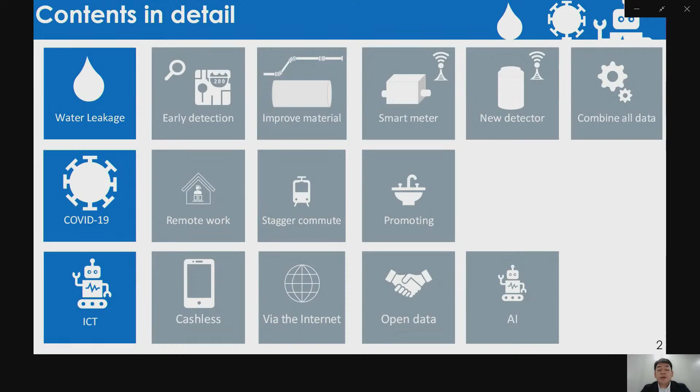As I have mentioned, my presentation is divided into 3 parts as follows. First, I would like to explain how to prevent leakage in Tokyo. Second, I will talk about COVID-19. And finally, I will explain the use of ICT.

Before we get into the content, I want to introduce the overview of Tokyo water. Please take a look at these figures. There are currently more than 13 million people living in Tokyo. With the exception of a few local governments, almost all residents in Tokyo use our waterworks. Our water supply area is about 1,239 square kilometers. The total length of distribution pipe is more than 27,000 kilometers, equivalent to roughly 2/3 of the circumference of the Earth. Annual water distribution volume is over 1 billion cubic meters. There are still more than 8,000 leak repairs a year. Tokyo is the biggest city, and we are the biggest water utility waterworks in Japan.

And I work with over 3,700 staff members. Now let's move on to the first topic.

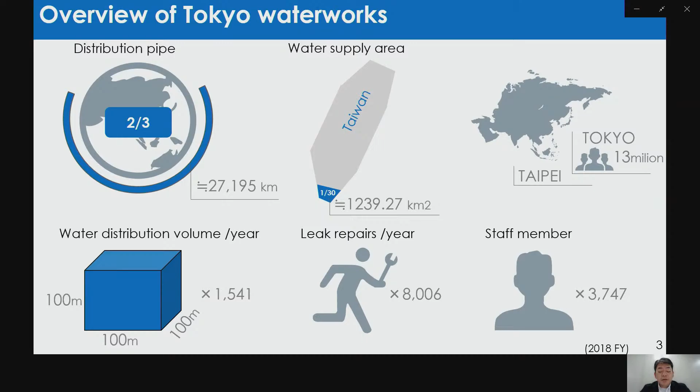I'd like to ask you a question now. Please guess, what is the water leakage rate in Tokyo? A, 20%. B, 10%. C, 3%. Please think about it.

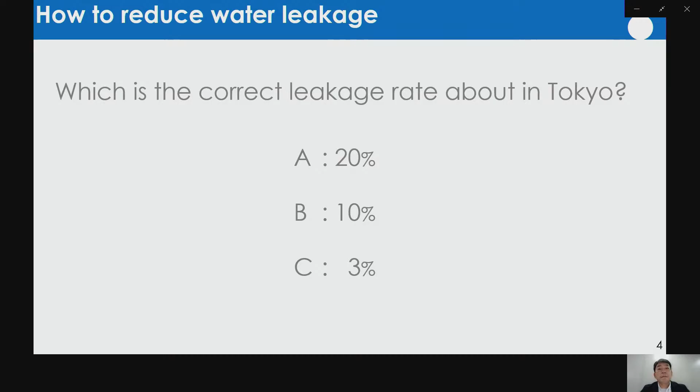Please take a look at this graph. The correct answer is C, 3%. In Tokyo, the leakage rate reached a hefty 80% after World War II. Emergency restoration after the war helped the leakage rate drop to 30% by 1949. The leakage rate was gradually reduced, and in 1992 it was down to about 10%. In recent years, it is kept to about 3%. Relative to the scale of our huge utility, we have one of the lowest leak rates in the world.

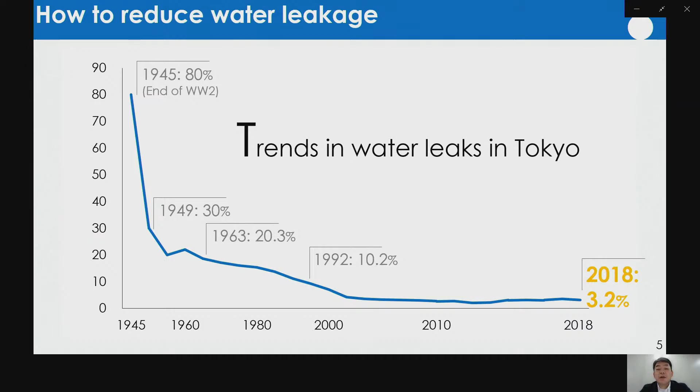So what kind of initiatives are necessary to maintain our current low leak rate? First answer is early detection and early repair of water leaks. In order to find underground water leaks, we conduct work called planned work. Specifically, we place a listening bar on meters of each customer to check for leaks of supply pipes, and we conduct leak surveys of distribution pipes by listening to the sound from street surfaces. The sounds from vending machines and sewers are also heard from the ground, and therefore a very experienced technician is required to tell them apart.

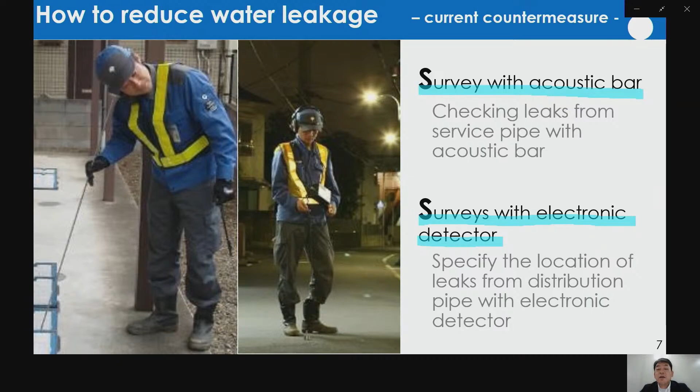Another method for finding the position of leaks is the correlation water leak detector method. We use these devices by placing sensors in 2 places, such as the valves on water distribution pipes. We can find the location of leaks by measuring the gap in time to reach each sensor. This method detects leak sounds directly from water pipe bodies, so it is possible to conduct surveys without being affected by urban noise or the depth at which pipes are buried. Normally, wireless communication distance is about 100 meters, and they can perform measurement up to about 200 meters at maximum.

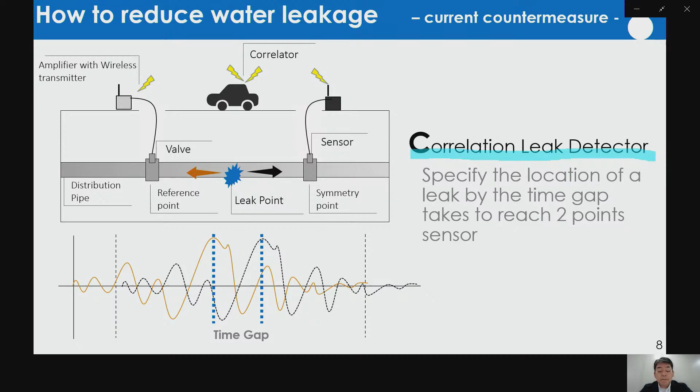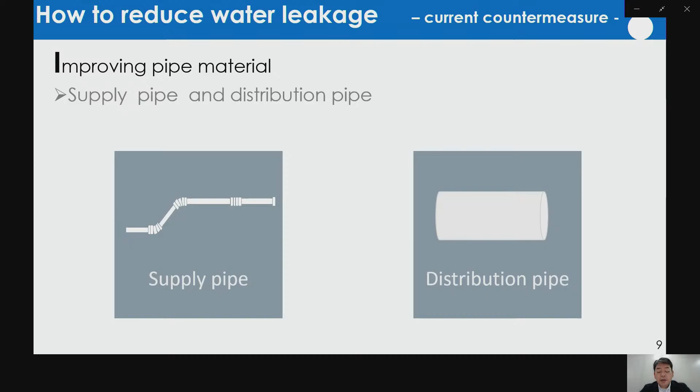Let's move on to the next answer. Second answer is improving pipe material. We have improved supply and distribution pipe material. In the past, our utility used lead pipes for water supply pipes on the roads. However, lead pipes are weak and corrode easily, so we switched to stainless steel pipe.

Currently, we use stainless steel products not only for pipes, but also for snap tap and valves. All materials used on the roads have been certified by our utility in advance to ensure product quality. Also, we are gradually replacing distribution pipe from weak cast iron to strong ductile cast iron. In addition, we wrap polyethylene sleeves around the pipes to prevent corrosion.

As you know, Japan is a country struck by an incredible number of earthquakes. Therefore, we use earthquake-resistant joint pipes with strong seismic resistance. The high elasticity and disconnection prevention features enable the pipes to follow deformation of the ground during earthquakes.

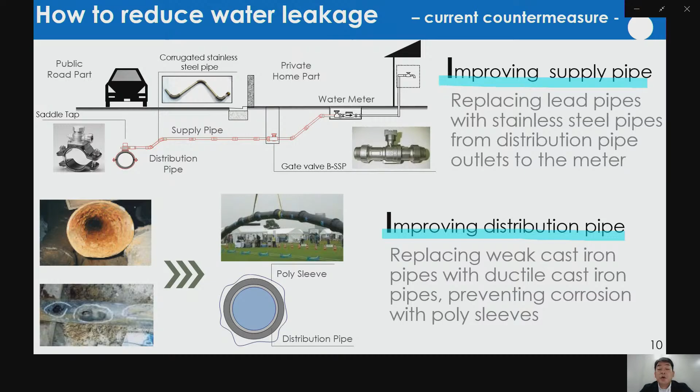Now, let's move on to the second topic, our future plan about water leak. I will explain the future plan from three aspects: smart meter, new detector, and data handling. First is the smart meter.

The Olympic Village has already been constructed in Harumi area. This Olympic Village installed 6,000 smart meters for condos that will be renovated after the Olympics. And by the year 2025, 100,000 smart meters will be installed in various areas in Tokyo.

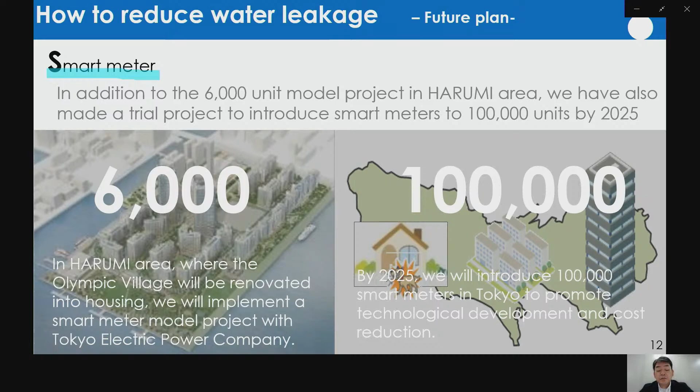In addition to these smart meters on supply pipes, we are considering the installation of smart meters on distribution pipes. This will make it possible to monitor the amount of water flow, direction, and pressure constantly. It's important for us to handle the data collected from new techniques. We believe that by combining data from these smart meters attached to water supply pipes and water distribution pipes, it will be possible for us to efficiently manage pipelines and speed up our response to water leak accidents.

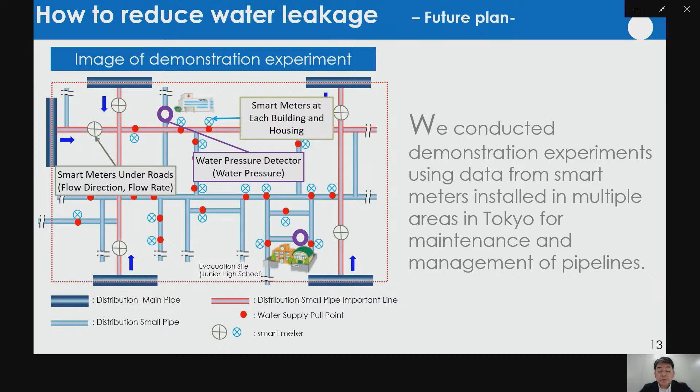Next topic is introduction of more efficient water leak detection methods. In current water leak surveys, there are subjects that survey methods feel dependence on human labor and difficulty to hear leak sounds.

The multi-point correlation leak detector is a survey device that we are currently examining. We have installed sensors on water control valves in multiple places on the road in order to find water leaks in a wide area at once.

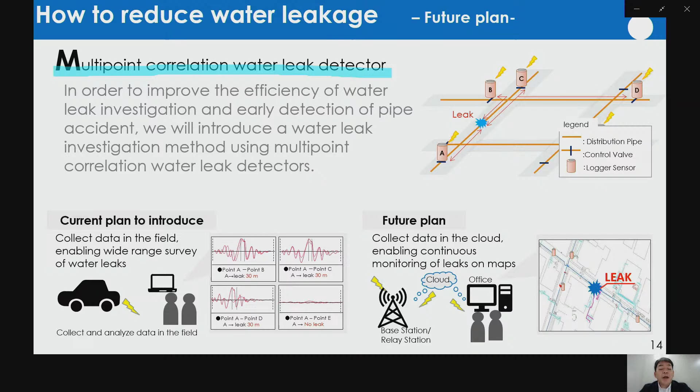By introducing this equipment, it is possible for us to efficiently conduct water leak surveys and to detect water leaks without being restricted by the surrounding environment. In the future, we expect to be able to constantly monitor leaks without going on site by collecting sensor data on the cloud with improved wireless communication technology and by combining it with a mapping system.

From here, I will talk about futuristic pipeline maintenance. Currently, we conduct pipeline diagnostic work for the entire Tokyo area. In this work, we survey the corrosion status of pipelines under roads and pipes under bridges and check the functions of valves and other equipment on site by operating them.

On the other hand, we have introduced a GIS system called the mapping system. This system has functions that display the arrangement of piping overlaid on map data, as well as functions to collectively manage information such as the age, type, and diameter of the pipes, and predict the area of suspension and turbid water because of constructions.

Our current problem is that the data obtained through the research and GIS system are not integrated. So, the huge amount of data is not reflected in the GIS system. As a result, there is concern that data will not be used when planning renewal projects as well as on-site work, and that leads to inefficient office work.

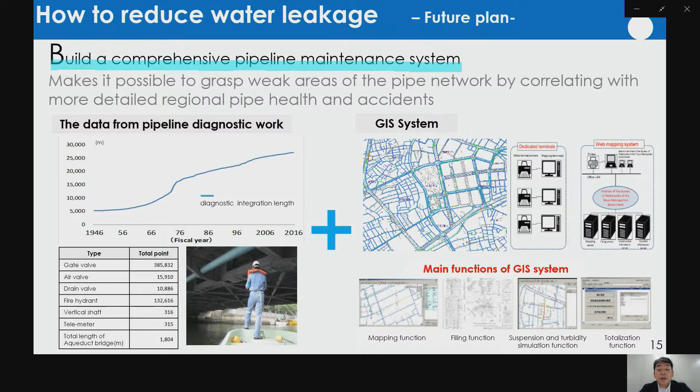By implementing this new system into a PDCA cycle, such as planning, management field, reflecting data, and verification, we will be able to efficiently execute maintenance work with limited resources.

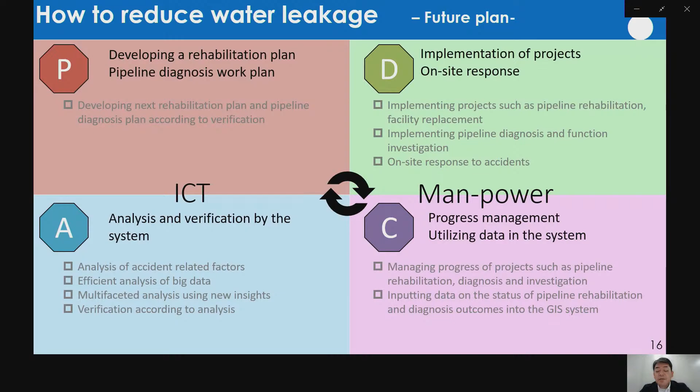In order to utilize diagnostics made by experienced staff efficiently and permanently, it is important that we combine and develop existing pipeline management systems. In the future, it is also important for us to consider new possibilities of ICT and AI, such as the use of mobile devices, and introduce them to our pipeline management work.

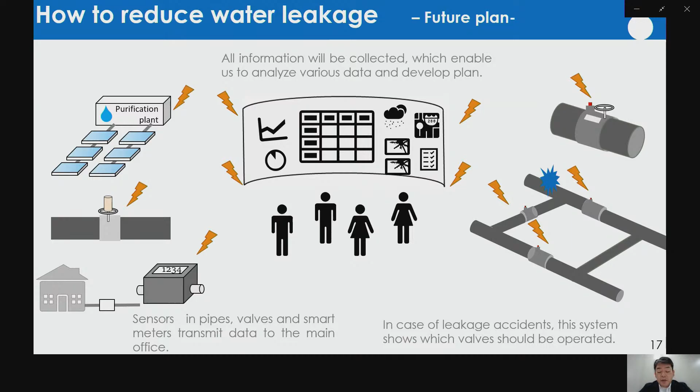This is the end of the second topic. Now let's go on to the next topic.

Next topic is COVID-19, which is now the focus of world's attention. I would like to introduce three measures that we are taking to deal with COVID-19. The first measures are remote work and staggered commuting.

This February, when COVID-19 began to spread in Tokyo, many companies began to promote remote working. In particular, many staff members in my office, which is located in Shinjuku, one of the biggest cities in Japan, are working from their homes.

Second, we require them to change their commuting times, which helps to reduce congestion of public transportation, such as trains.

The last point is about the prevention of infectious diseases. Hand disinfection is considered an effective way to prevent infectious diseases. Tokyo water contains chlorine according to Japanese regulations and provides sanitary water. Therefore, we promote proper hand washing using tap water, which contributes to the prevention of infectious diseases.

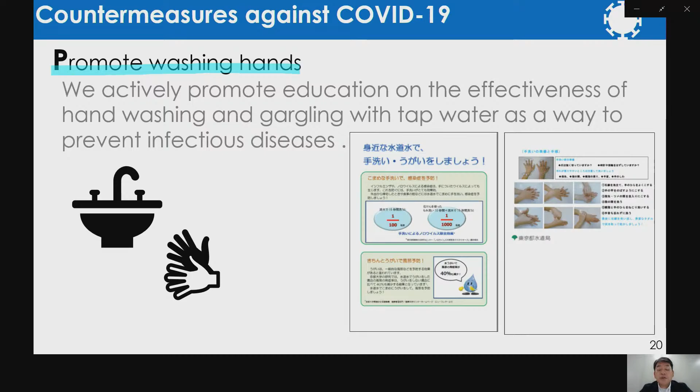This is the end of the second topic. Now let's go on to the final topic. Final topic is ICT. I would like to introduce 4 measures that we conduct with ICT.

In recent years, cashless payment with smartphones has become more and more common in Japan. So we have introduced a system that allows customers to pay their water bills via smartphone. This has made it possible for customers to pay their water bills with simple operations.

Next, let's talk about ICT-based projects. In the past, plumbers had to come to our office to browse water drawings. Now, plumbers can search, view, and print the drawings through the internet. This allows them to view them even when our service office is not open.

As well as browsing drawings, applications for new or modified water supply systems can be submitted via the internet. This system can reduce the waiting time for the water service provider's review.

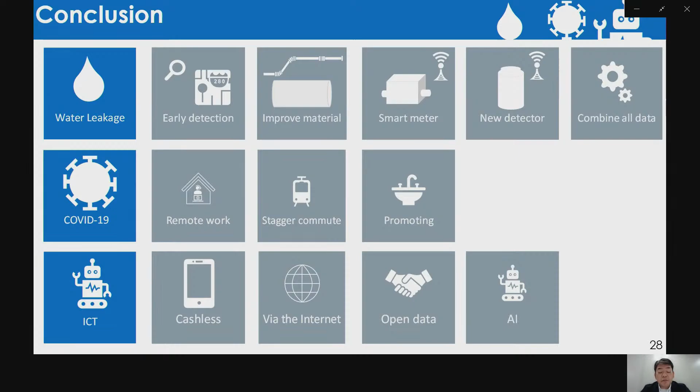I hope that my presentation will be some assistance to your countries and regions. There are 10 months before the Olympic and Paralympic Games. I look forward to seeing you in person here in Tokyo. This concludes my presentation. Thank you for listening, and I look forward to seeing you in the discussion later.

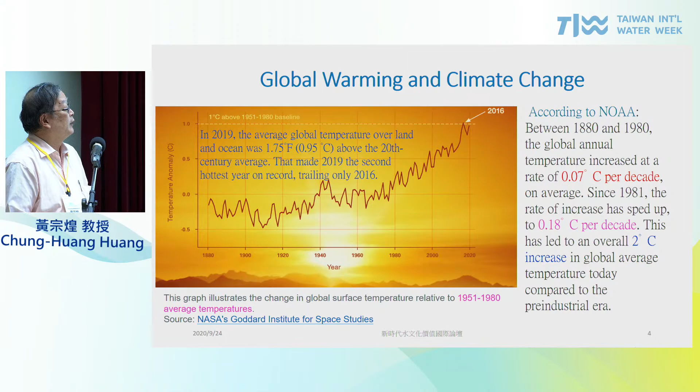This is the global change, the global warming situation, and this is the crisis or impact of climate change. I try to highlight all of them, and here you can see that the impacts of global warming on the water sector or water industry could come from different aspects—extreme weather, heat waves, droughts, melting ice. We can see this later on.

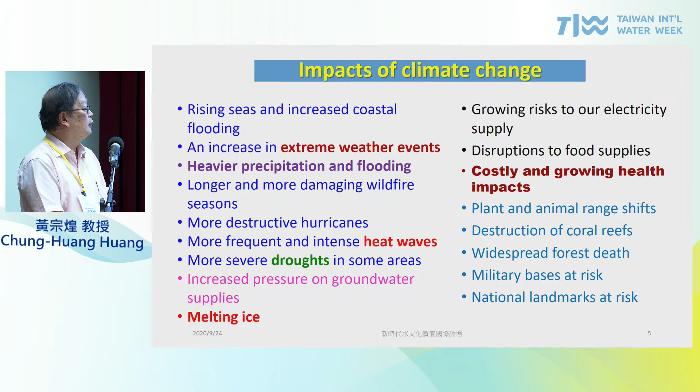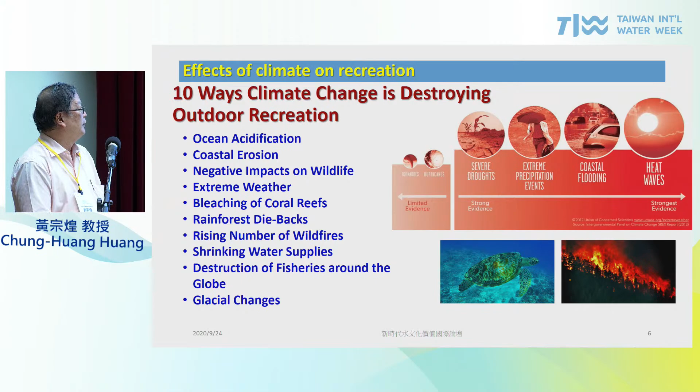Probably I would like to show you—oh my God, look at this! Oh! Oh my God!

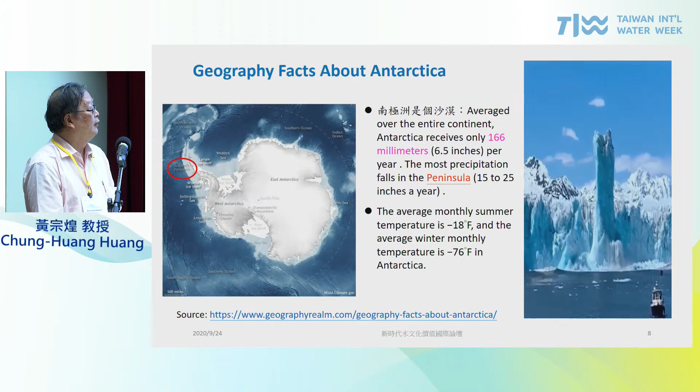Holy! Oh my God! Look at this run! Oh! Oh my God! Okay, and this is this situation associated with the Antarctic.

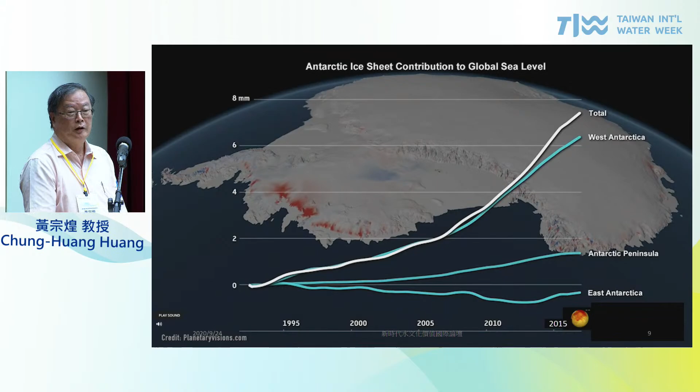South Pole here. And as we can see, the ice melting caused the sea level to rise significantly, especially in this area, in this region. And the problem from this is not only the sea level rising, but also water supply.

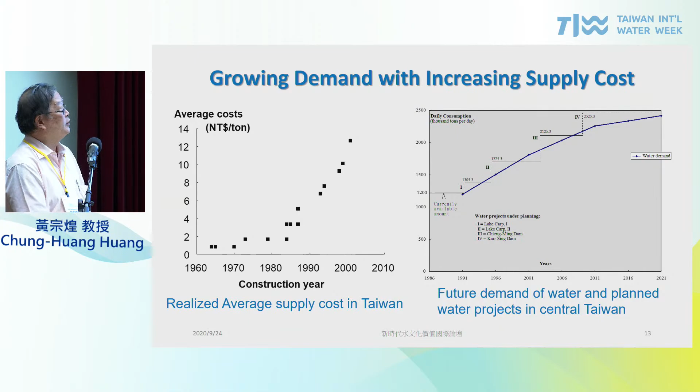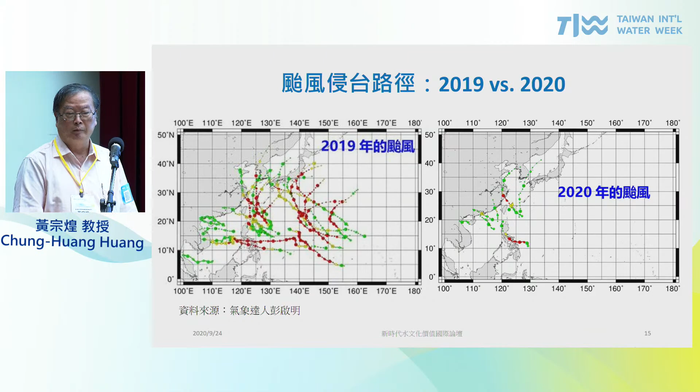And we are wondering, because this year although we don't have much typhoon coming to Taiwan, how about next year? Probably it will be another situation.

Just a very brief introduction about this. There are several important factors relevant to water pricing. The first one is, of course, the organizations. We have different organizations listed in our Water Act, and also there's a water priority of water use in our Water Act.

Fortunately, we have some policy innovation in this aspect that allows the priority to be more flexible in response to certain conditions, especially climate change or water drought season.

And water-related fees—the topic I'm talking about today is much more on the integration of these subjects, these instruments: water tap price, water right fee, water excessive use fee (耗水费), and loss compensation because of unavailability of your water rights. You cannot get enough water supply because a certain situation happens, and there will be some compensation either from the water authority or from other demanders of the water company.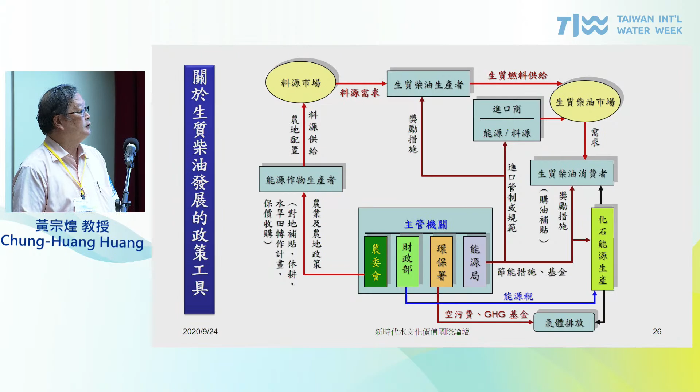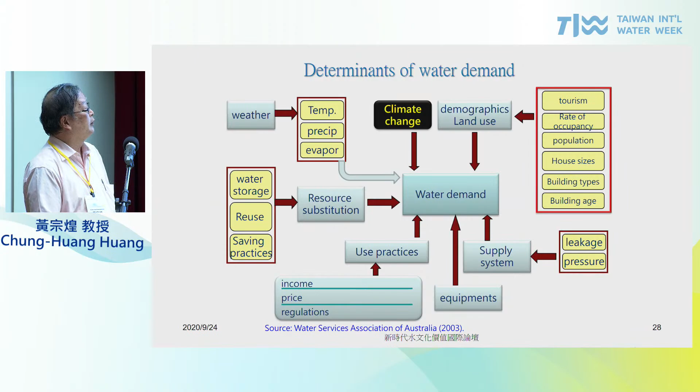And this is an example - we also have this model built and several simulations implemented. This is another policy framework for water supply. Because of time constraint, I will not go into detail in this part, but this shows how the modeling could be completed, and the same applies here.

Because of the time, I will now come to my major conclusions. First of all, the integration of policy is very important. It's not only an economic problem, it's also a social problem and a resource problem. It has a significant impact on society.

The integration of policies, although very complicated, is operationable if we can work together in a more harmonized way. Then we can end up with a model that will allow us to evaluate, in a more effective way, the impact of climate change on water supply or water efficiency.

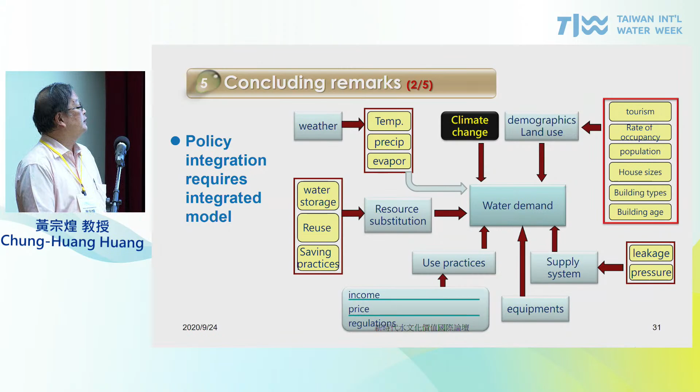Incomplete enforcement always prevails in many sectors, including the water sector. The problem is, when doing policy integration, how can this be taken into account given incomplete enforcement, as we see many different forces causing it. Policy integration requires an integrated model, as I mentioned before.

Another important conclusion is that water policy should not be independent of macroeconomic policy. From the experience of the financial tsunami, we can see that macro policies are very relevant to many policies, including environmental, energy, and water policy. The problem is how can we integrate water policy into our national or macro policy. This diagram shows the linkage between them.

In the last presentation, Mr. Tanimoto mentioned a lot of new technologies applied in the water industry, especially for monitoring water leakage. In the face of the fourth industrial revolution, there are so many newly emergent technologies available, and many of them could be deployed to improve our water industries, not only in policy integration but also in water use efficiency.

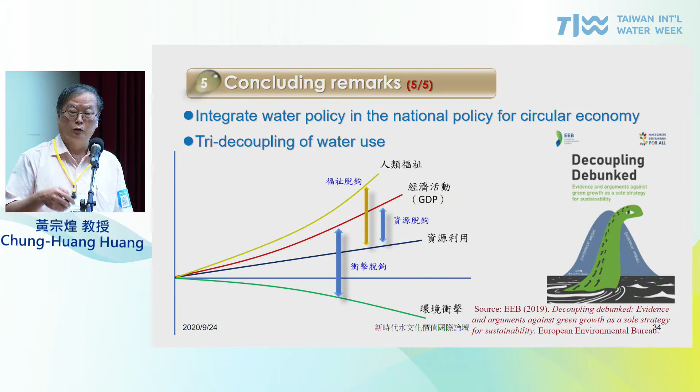Many governments are reinforcing the importance of this linkage. In the water sector, we hope we can put more emphasis on this subject too. We are interested not only in resource decoupling and environmental impact decoupling, but more importantly, welfare decoupling. When we use water more efficiently, we hope the benefits created could improve all generations.

Finally, there are many challenges in this new era, including how we deal with the changing role of water resources in our new society. Health is one of the important topics. As Mr. Tanimoto mentioned, COVID-19 is also very much related to water resources. In the future, how can we build a linkage between the two?

Health, time, energy, and other aspects, macroeconomic policies or variables, to quantify the well-being loss from climate change and health. Although this hasn't traditionally been a topic in water resources, in the coming future we think integration with other areas is also very crucial.

New challenges to CGE modeling, as I mentioned, integrated modeling is also very important to avoid the same mistakes we made before. We have to cope with the new industrial revolution, deal with demographic change, and finally integrate uncertainty and discrete choice.

All of this will not be done here. We hope that in the coming future we can make our integrated models more complete and comprehensive, so that many factors could be integrated into our model. Thank you very much for your attention.

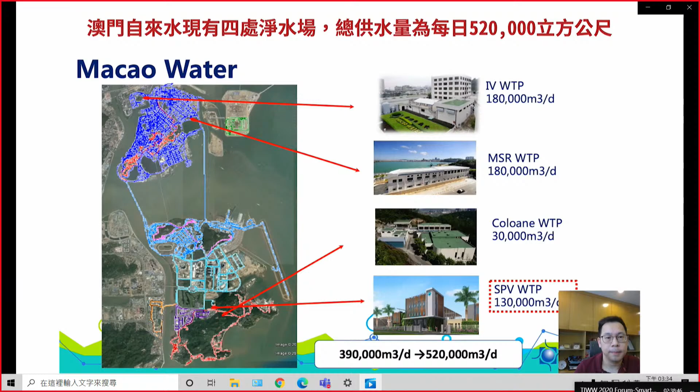After that, we do digitization. Digitization is the fundamental basis for smart water evolution, but digitization alone is not enough for smart water development. We also have to base it on automation and modeling. With these two stages, we can achieve 'smart,' though we're still far from artificial intelligence. Macau Water is mainly focused on digitization combined with automation and modeling to achieve smart water. Once mature enough, we will move to artificial intelligence.

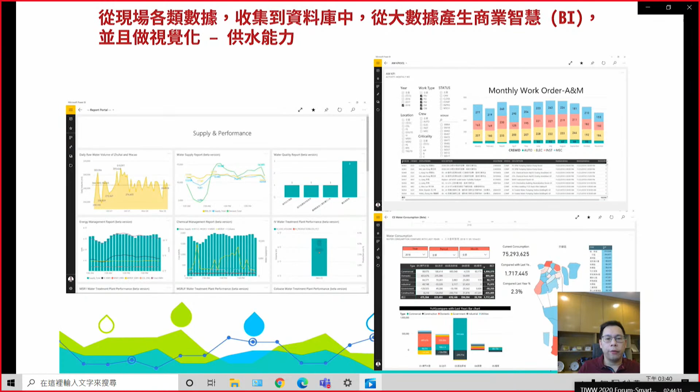I will show you one example of Power BI usage in Macau Water. Here is 2 months of data on LIMS alarms or alerts in the network. We found that there are 5 alarms in the network for the past 2 months, and we located one location, in Haksa village, which is a low residual chlorine issue. The figure is 0.03, which is pretty low.

So we try to locate the upstream and downstream of Haksa village. First, we look at the Haksa village data for the past year - the residual chlorine data - then the upstream and downstream. We find that the downstream and upstream don't seem to have any issues or problems, so we can conclude that the problem is the Haksa village sampling point itself. This Power BI helps us make decisions.

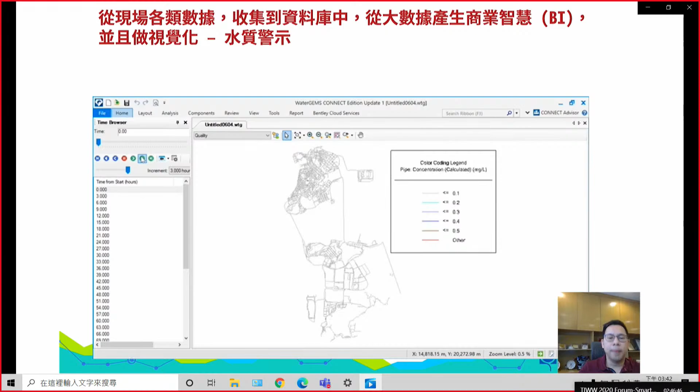So from time to time, we have to flush the networks, trying to keep the age of water young. That is decision-making through this hydraulic model.

Besides the master data management and modeling, we also have advanced water network tools. This is a quite advanced water network platform, and we can see the water coverage from different water treatment plants. We have 3 treatment plants, but 4 pumping sources at the moment. The red represents one treatment plant's water coverage, and other colors represent different water treatment plants. We can identify that at different hours and periods of time, the coverage will differ depending on pump operations and control valve operations.

You see that on this particular day, at 1 o'clock midnight versus 2 o'clock, they were very different. And 8 o'clock in the morning, 9 o'clock in the morning, 6 o'clock in the evening, 7 o'clock in the evening - so every hour we have different behavior in the water supply coverage.

As you can imagine, we can also modify or monitor the different water supply velocity and head losses in individual networks by means of this platform, because we embed the online hydraulic model inside it. This is very useful for our operators and network engineers. So we've talked about data management and model usage.

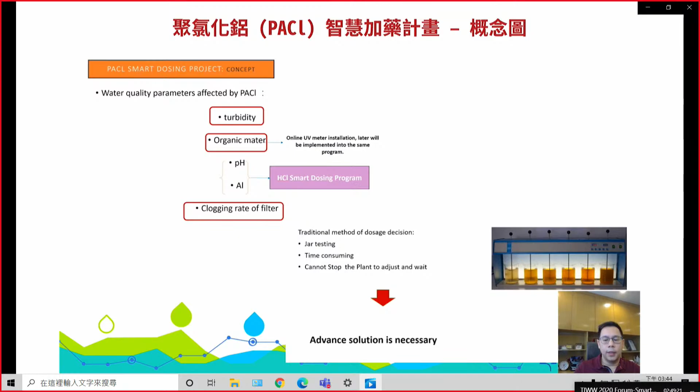We have to take a lot of parameters from the treatment plants, so we install a lot of sensors. The project started in 2017 and took less than 1 year. We succeeded in implementing this smart dosing, installing quite a few sensors for our water treatment operations in Macau Water.

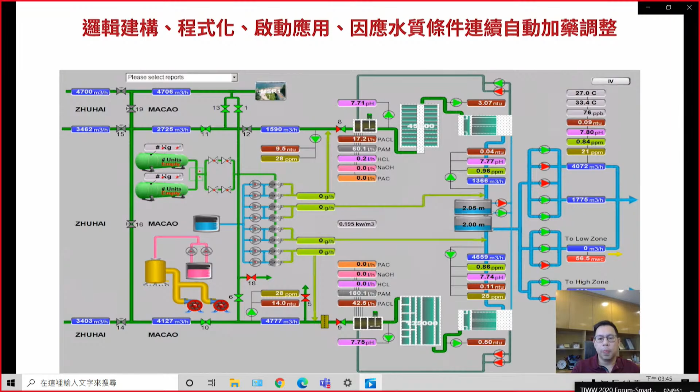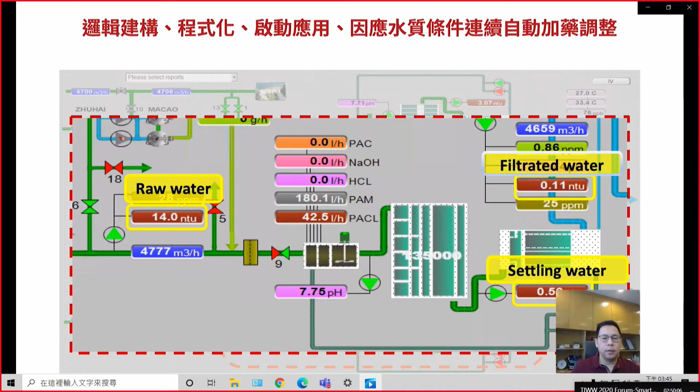We have quality sensors at the raw water, settled water, and filtrated water stages. They feed back data to our automation systems, including filter parameters like filter clogging rates, production of plants, backwash of the filters, etc. These combine together with the water quality sensors.

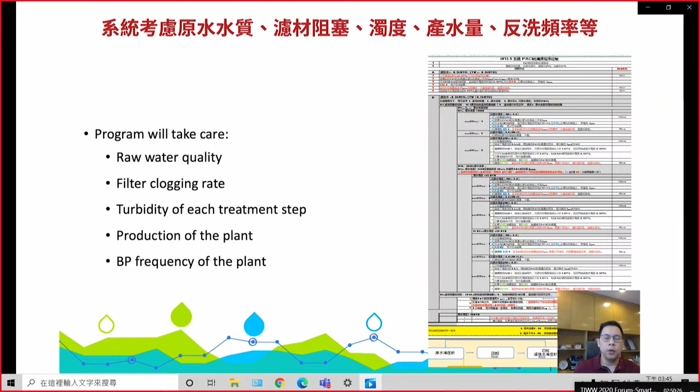After 1 year of operations, we saw something like 30% to 40% savings compared to previous years, even previous 5 to 10 years. We achieved as large as 50% savings for the PACL dosage. This is quite significant, and beyond our expectations, we can say.

Another example is AMR smart metering. We installed about 500 meters to cover all of Cotai city, which is a commercial area - most of the casinos and big hotels are in these areas.

We use the Suez solution called FM169. We only installed a very few concentrators that can connect across this area, which is quite large compared to the whole of Macau. Only 3 to 4 concentrators can receive all the meters in this area.

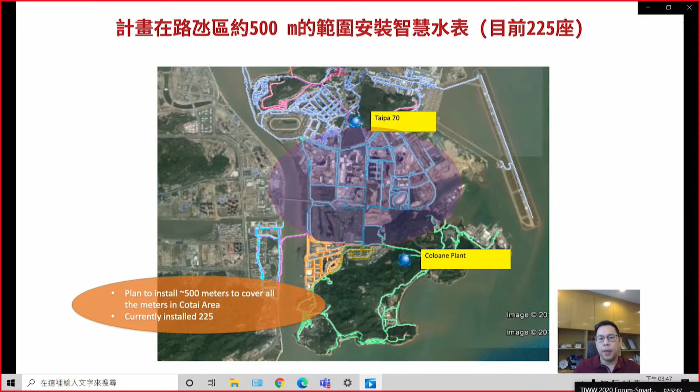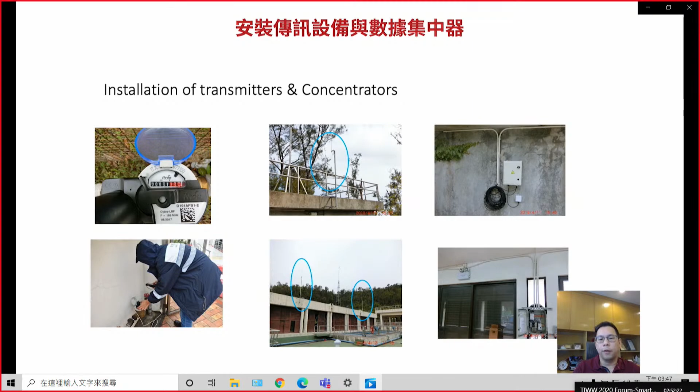We installed about 500 meters here using 3 types of concentrators. They connect all the meter readings, and then through GSM transmissions, send all those 500 meters' data to a data server. The data server platform is called EMIS, which tries to collect and analyze the water supply behavior, and also detect any leakage inside the properties.

We successfully feed this back to our customers - quite a few leakages have been detected through these systems. This is also part of our smart water sectors, and we have succeeded in building an integrated reporting system, along with smart solutions like smart dosing and AMR.

I would like to talk about another sector, the enterprise application platform. As I mentioned, in a water company we have different systems - for example, in the financial department we have a financial system, in the laboratory department we have a LIMS system, in the network department we have GIS, and in the customer information department we have a CIS system, etc. But they are independent of each other.

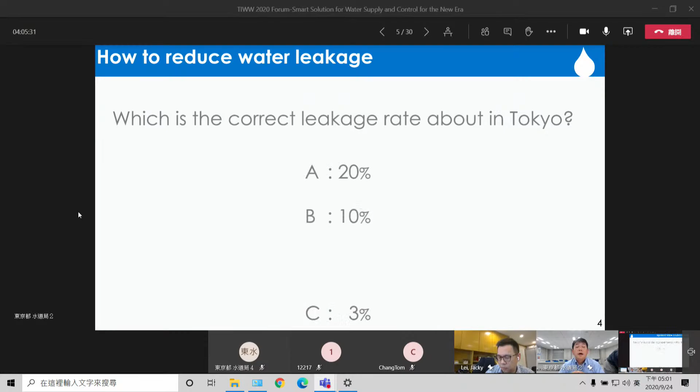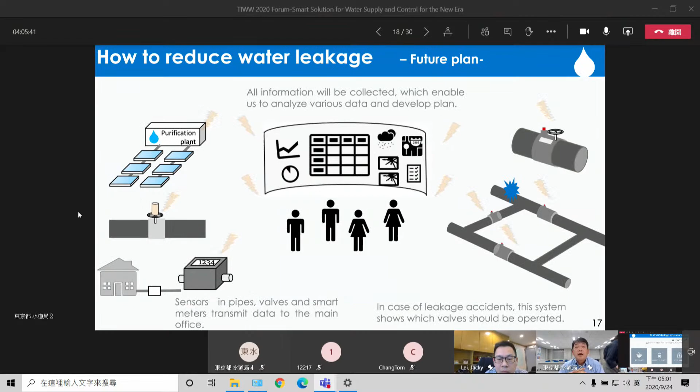Yeah, but for Mr. Tanimoto? Can you show the presentation with my slide? Please show page 17. Slide page 17. Yes, this is it. Yeah, we have the slide, page 17. This is it. Okay, yes.

So now we don't think about different prices and different use volumes for night and day, but in the future, in a few years, we have a planning about an installation experiment, like so. Especially, please show the water pressure detector in the upper area. Yes, and the same sign is on this picture down here. Yes, that's right.

In fact, this system will calculate the water volume and water flow. So we will check the volume and flow at several times - the normal time, national holidays, or night and day. So that we will realize the way water is used by domestic users. After this experiment, we will make a new plan for the distribution, a new distribution type. That's all.

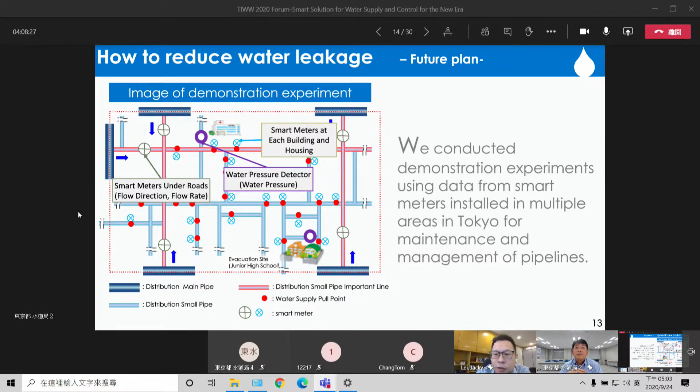Okay, yeah, Jacky. I don't think we can easily change the behavior of the customer to make them use more water during the midnight. I don't think it is possible. In many cities, it's the habits of the people that are trying to use their water. And for the tariff of the power in Macau, we do have differences during the midnight and the daytime. And I think we can use another way, trying to save the power or save the energy.

It's something like high elevated water tanks. You can pump out more water during the midnight and store it in the water tanks, because at midnight, the power tariff is lower than the daytime. So then we can use the stored water to release more water from the reservoir to the customer during the peak hours. So that will be more feasible. And overall, I think we are talking about optimization of the operational power or pumps.

And I think in the market, there are a lot of tools available for us to optimize our pump power consumption, especially in water companies, where the majority of power usage is in the pumping stations. So pump combination scheduling, optimization of the pump scheduling - there are a lot of tools to help us do something like that. But the point is we have to have the data, lots of data to help us make the decisions on which combination of pumps will be optimal.